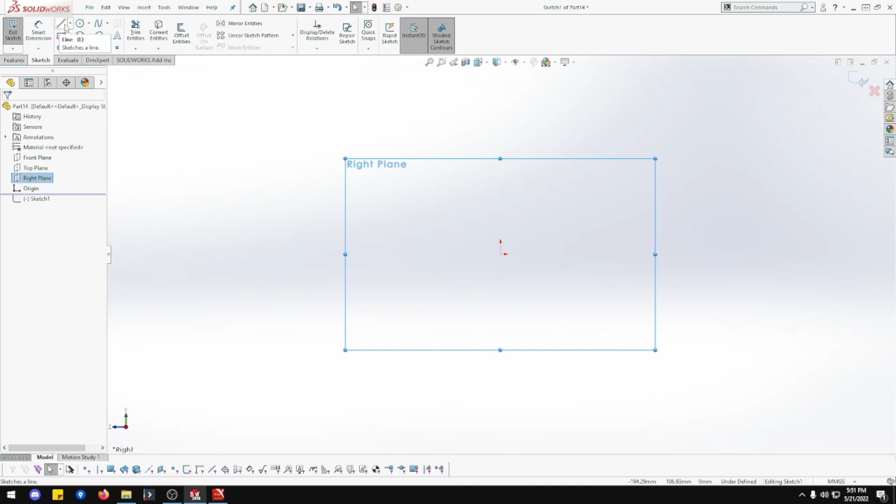Okay, so still drawing lines. Let me do it still square, so you go from there. Do that one. Okay, so this is going to be 146 up top and 76 plus 13, 89, yep. So it can be 89 down. Zoom that in. Okay.

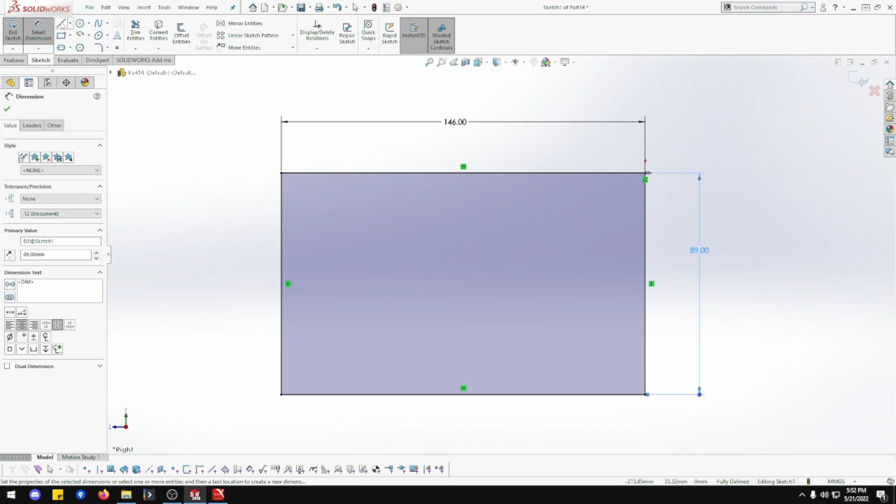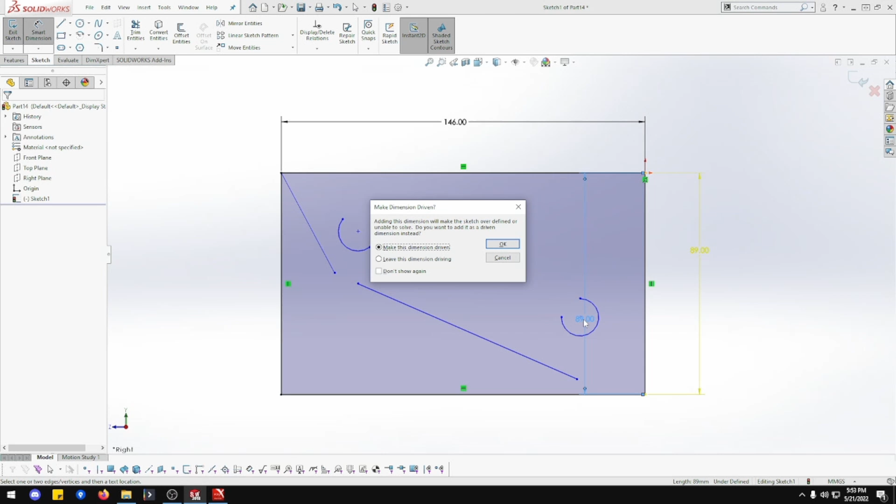So now, let me draw a line from here to there. And just there for roughly, let me delete that one. So I need 2 radii of 13. Go from there to there. There to there. Okay, perfect. So it's got 13 from there to there. So this one's easy to work out. From there to there, gonna be 13. From there to there, gonna be 13.

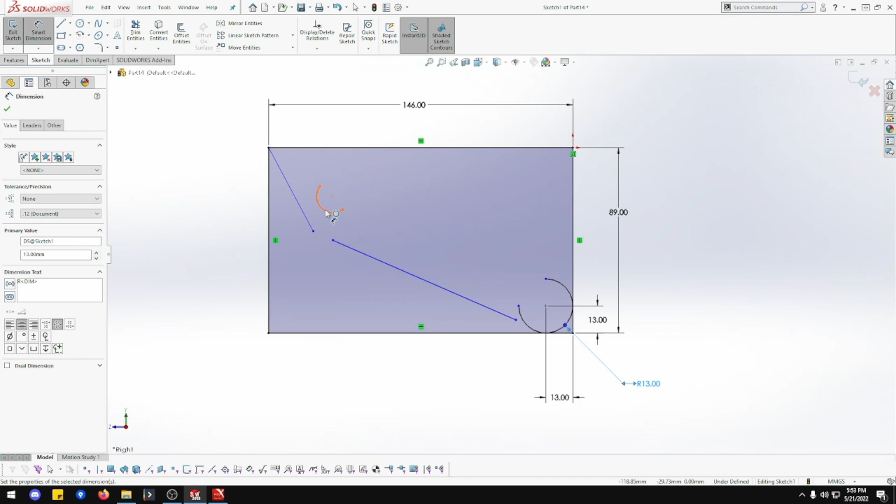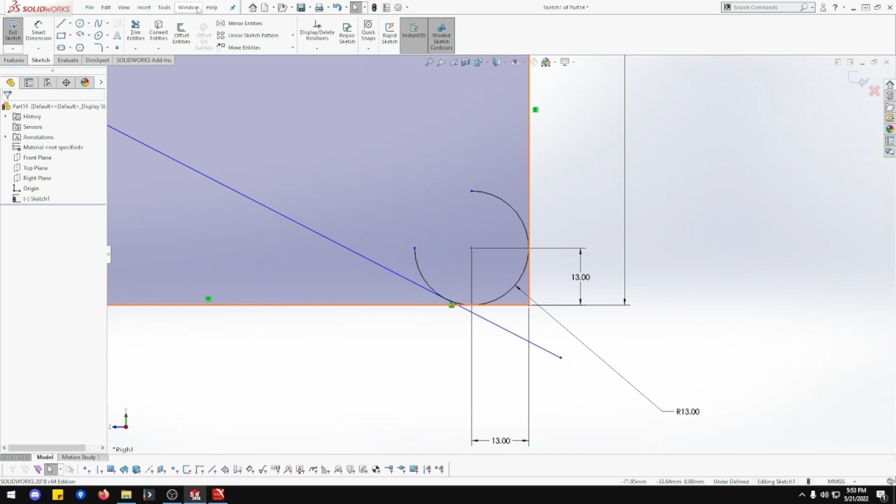Oh, I haven't done that one yet. 13. I'm thinking, why is that not reaching there? Oh, I forgot. Let me just do that one. 13. There we go. Now this one, let me put that there. That one can go. Nope, did it wrong. There we go. Tangent. Actually, before we go any further, let's pull that way out. This makes it easier to trim. Now let me just trim that one, and that one, and that one. That one. There we go. Trim that one. Beautiful.

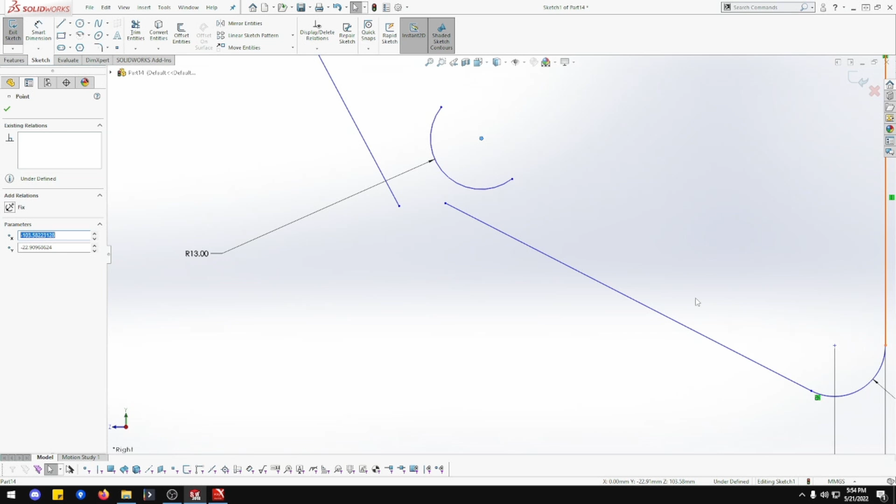Okay, let me just put that one there. So the problem with this one is it's got the distance from here to there, which is 60. Yes, correct. Oh, because we deleted some stuff down there, got rid of that measurement. So let me just put this one back in. That was 76. Beautiful. See the lines are black? That means they are defined. They cannot be moved. Where they're blue, you can move them around. That's why I couldn't move it.

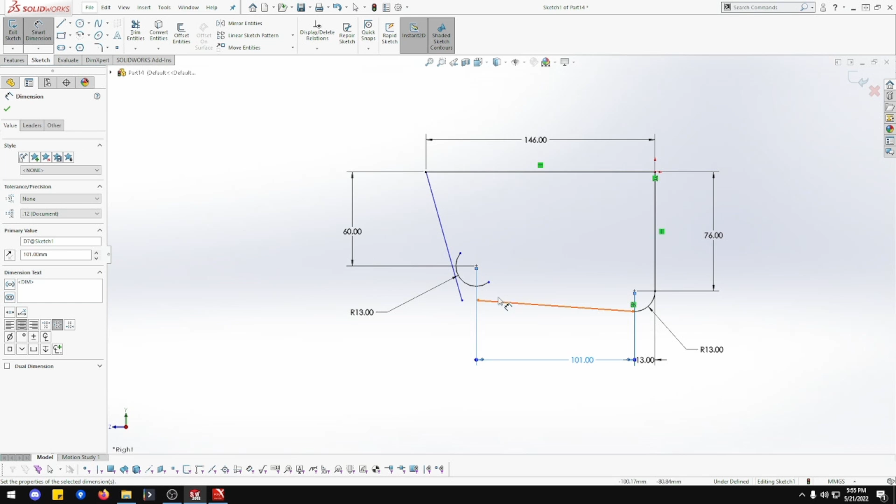Oops, missed. Okay, so 60 down. I see the measurement. So from that one to that one is going to be 101. There we go. I just couldn't see the measurement for looking. Let me grab that line and that line, make tangent. That line, make tangent. Oops, missed. Trim, trim, trim, trim, trim, and trim. That should close in. Beautiful.

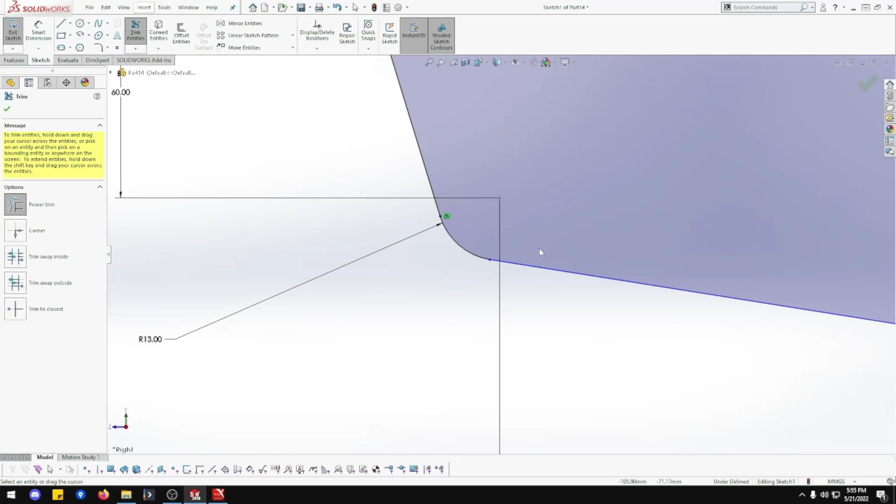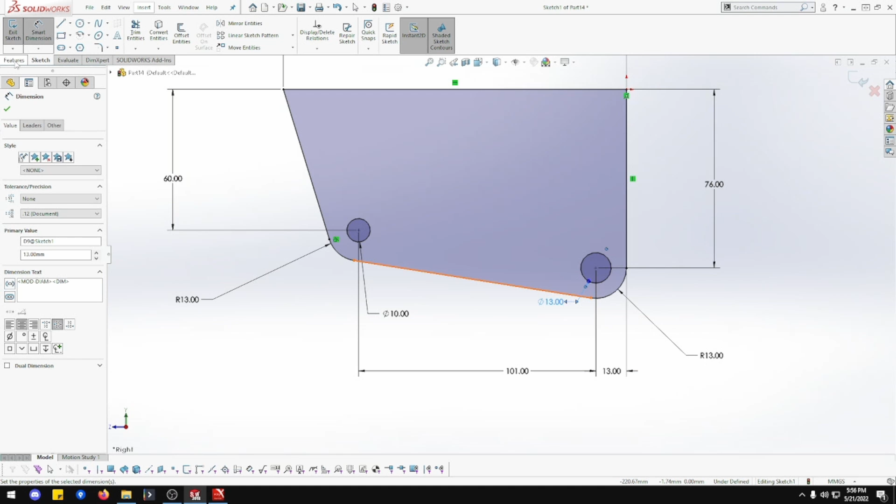I'm going to do something a little bit different here. I'm not going to use the bolt holes like before. I'm going to use these ones. So we've got that one there, that one there. Probably not quite that big. Now this is 10, and this one is 13. So that's all needed on that side. So now we go to extrude. It's 25 plus 2, 3, so 31. Mid plane and done. And we're just going to do the same that we've done before and just cut the center out.

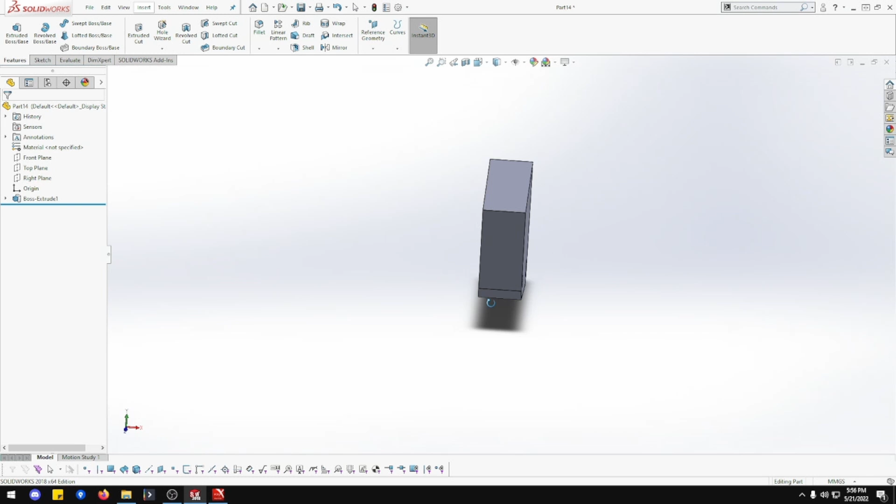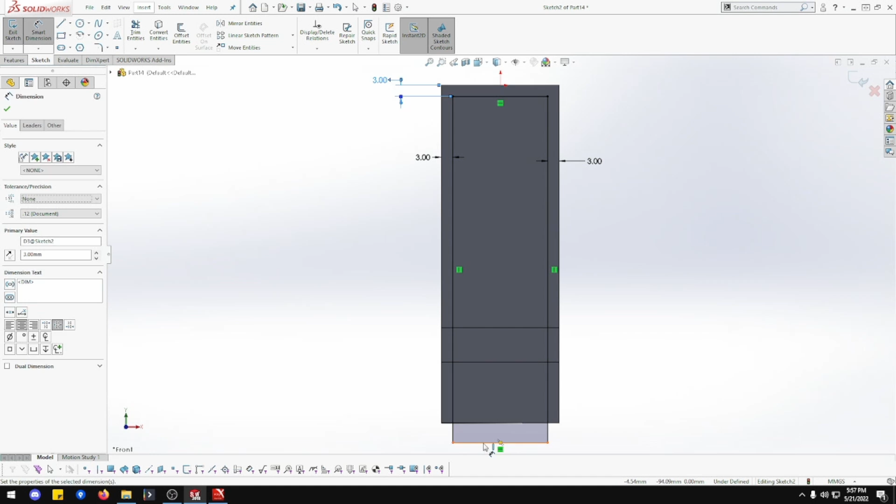Oh, that looks so close. I thought something didn't line up right. So let's go to front plane. Yep, front plane, beautiful. Smart dimension. That one to there, it's going to be 3 mil. That one to there, 3 mil. That one to there, 3 mil. That's all we need. This here doesn't matter, because this is going to cut through, so it doesn't matter whether it's not defined. If there's something left behind, you definitely need to define it.

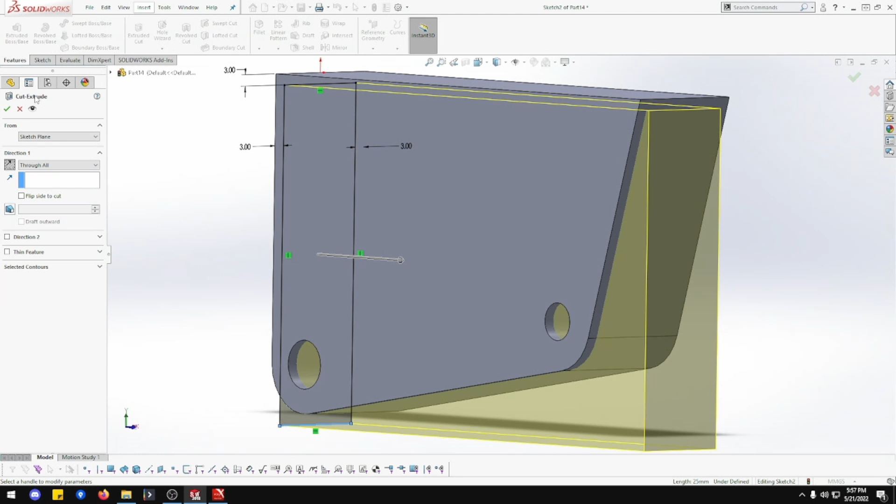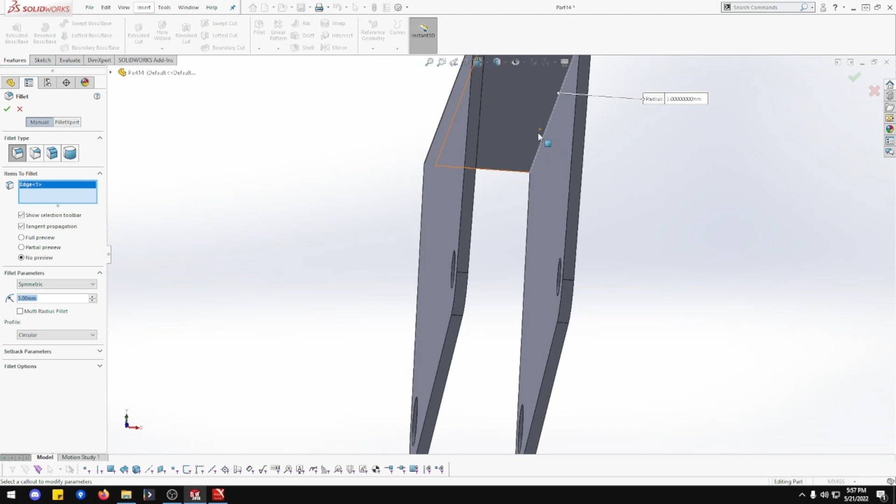Okay, so now the feature, that one, through all, reverse it. Doesn't go through, reverse it, and done. That's looking good. Now we just need to go fillet, 3, 1 there, 1 there, and okay. Fillet, that one. You gotta be careful you don't pick up the one behind, so make sure you grab the right one. And there's 1.5, and done. That should be that piece done. So you see the difference between this one and the last one. It's a big difference.

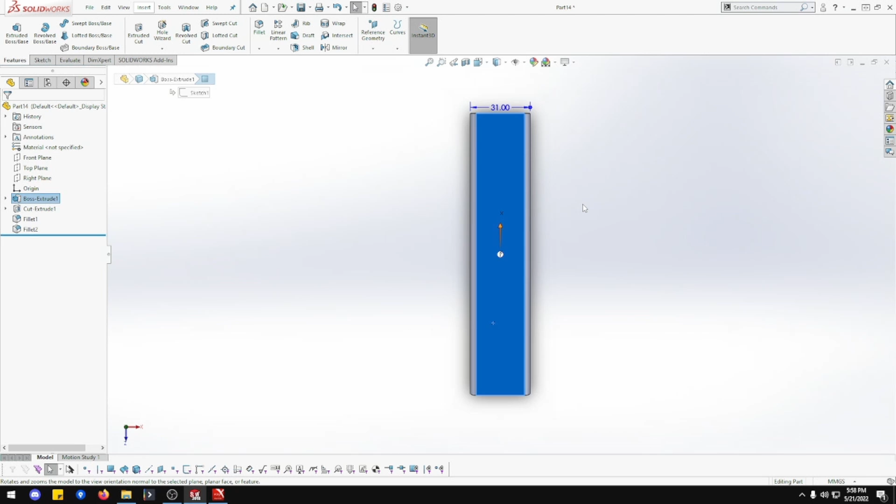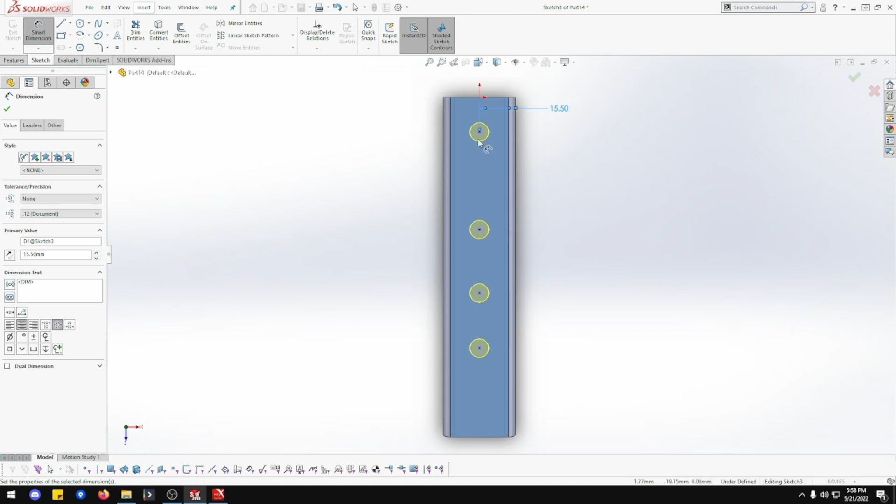Oh, no, we're not done. We need to put some holes in the top. Almost missed that. So now we're going to go to hole wizard. They're going to be 8, through all. Excellent. 1, 2, 3, and 4. First of all, let me just do 15.5. Beautiful. So it lined up with that perfectly, but didn't lock into that. It can move side to side, so that's why it never came up fully defined.

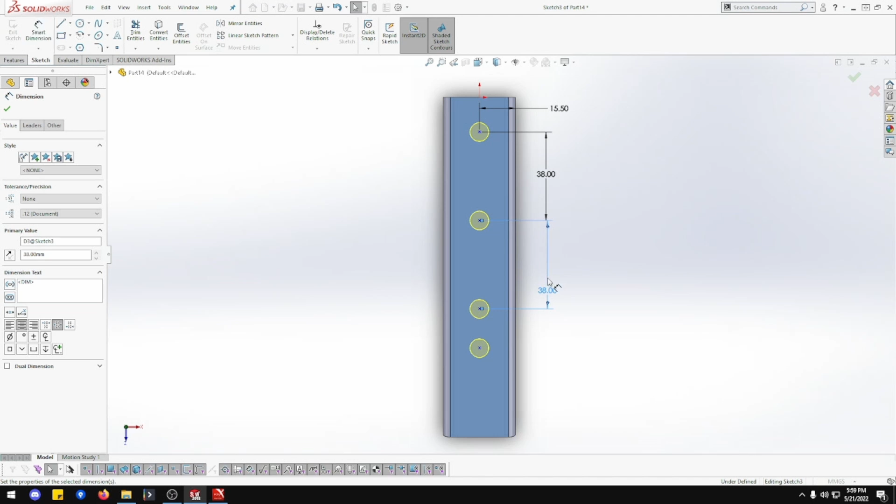38. Oops. No, don't want that. I think what it is, I'm grabbing that blue one, because that's the measurement. I think that's what it was doing before. That one is 38, and that should be 15.5. Oh, hold on. No, I haven't done that measurement yet. Sorry. Oh, right. Okay.

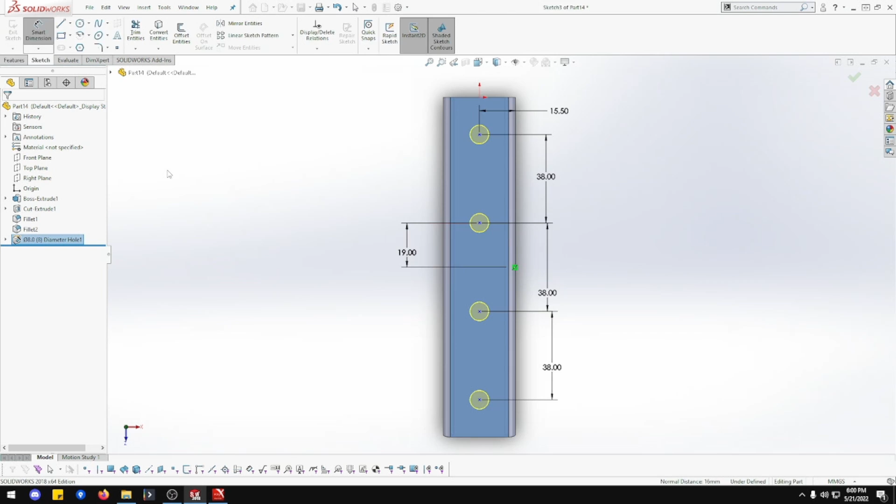So that's easily done. Let's find the center mark. There it is. Nope, that's not what I want. Sorry, that one highlighted. 38. Smart dimension, that one to that one. It's going to be 38 divided by 2, 19. So now that should be halfway. So that one is 16, and 16. It's halfway. Beautiful. Got no measurement there, so I presume that's halfway. If we have to change it later, we change it later. So click OK on that, and there's that piece done.